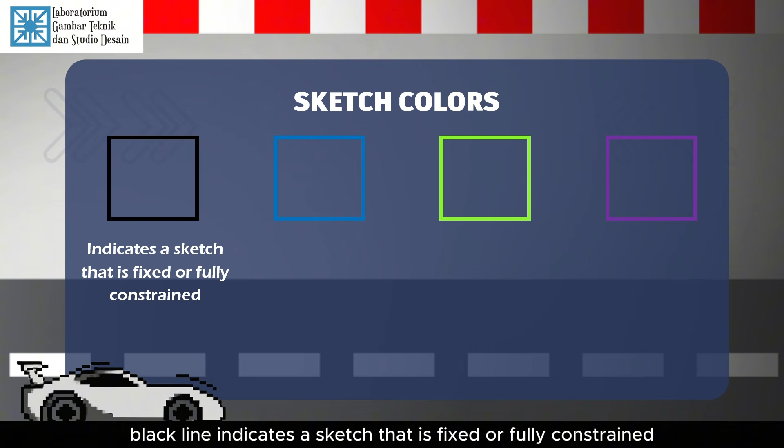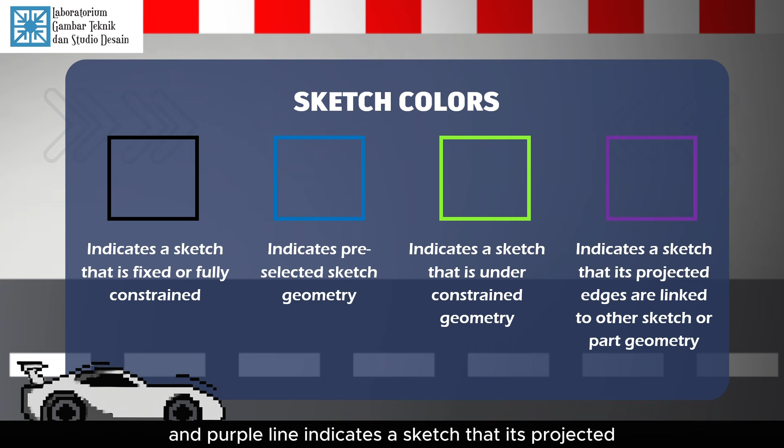In Autodesk Inventor 2026, there are sketch colors. Black line indicates a sketch that is fixed or fully constrained. Blue line indicates pre-selected sketch geometry. Green line indicates a sketch that is under constrained geometry. And purple line indicates a sketch whose projected edges are linked to other sketch or part geometry.

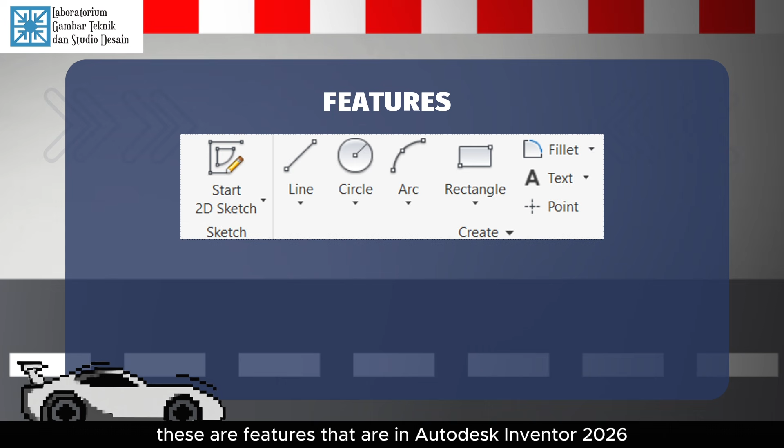These are features that are in Autodesk Inventor 2026. The Sketch panel tab is used to choose a plane for your design, while the Create panel tab is used to make a sketch in a few types of choices.

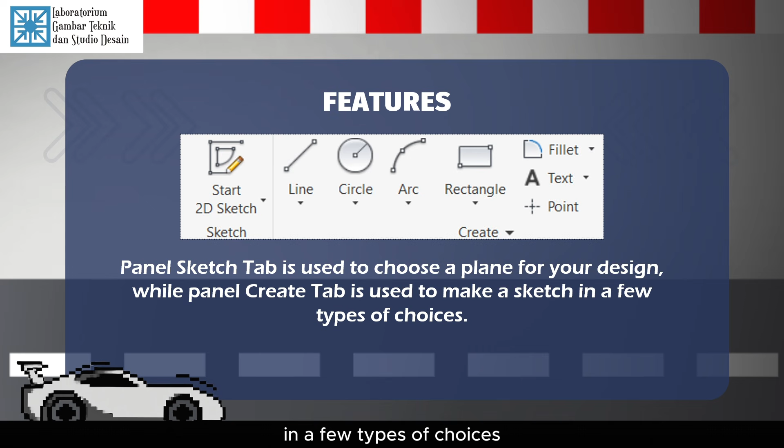Projected geometry is used to make a new sketch using the active geometry. Modify is used as editing tools for our design sketch.

In the sketch creation process, some simple things may become an inconvenience if done manually, such as creating a pattern of a geometry, mirroring a huge part of a sketch, etc.

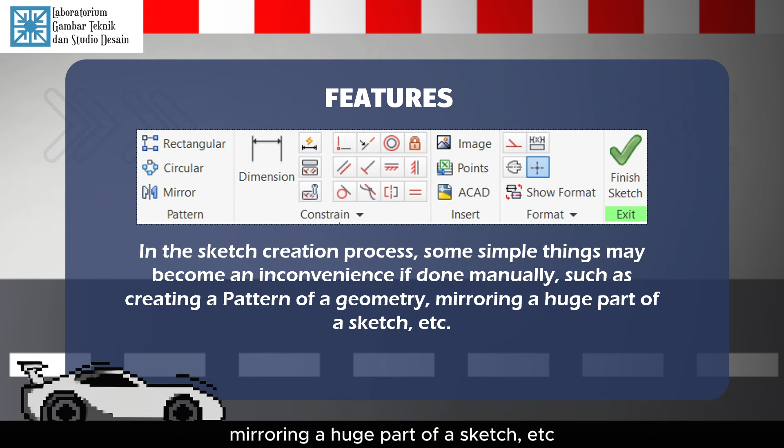Click on New, Expand, en-US, choose Metric, choose Standard mm.ipt, and then click Create. Save part file to labwork folder. Press Ctrl S on your keyboard, rename it to Base, after that click Save. The screen should look like this.

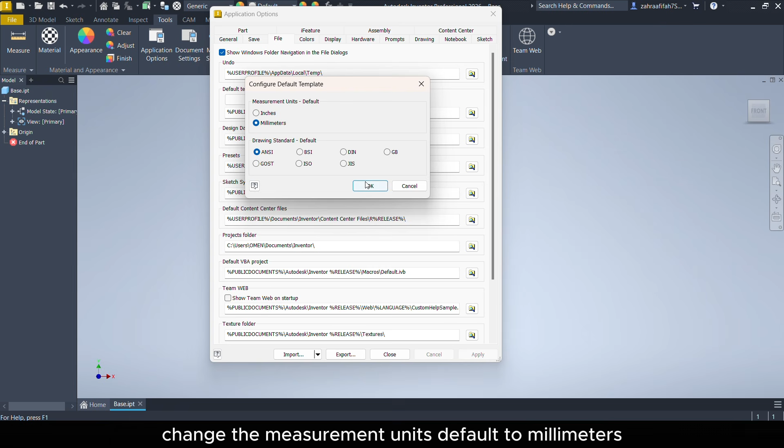Go to Tools tab, choose Application Options, select File, click on Configure Default Template, change the measurement units default to millimeters, click on ANSI, click Override, click Apply, and then Close. The screen should look like this.

Go to Sketch tab, expand Start 2D Sketch, choose Start 2D Sketch, or you can press S, select YZ plane. The result will look like this.

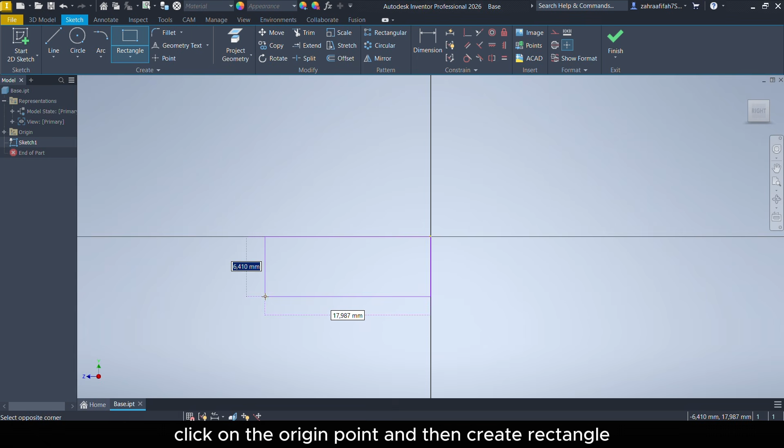Expand Rectangle, choose Rectangle to Point, click on the origin point, and then create rectangle, left click, and right click, after that click OK. Click Dimension, click the vertical line, give dimension 20 mm.

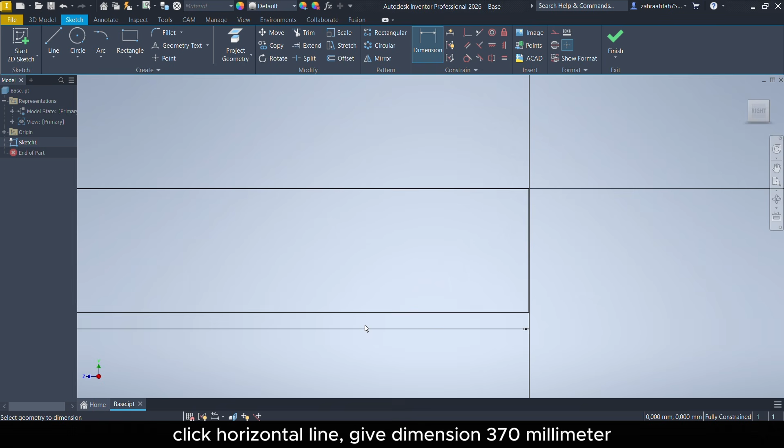After that, click Enter. Click horizontal line, give dimension 370 mm. After that, click Enter. Right-click and click OK.

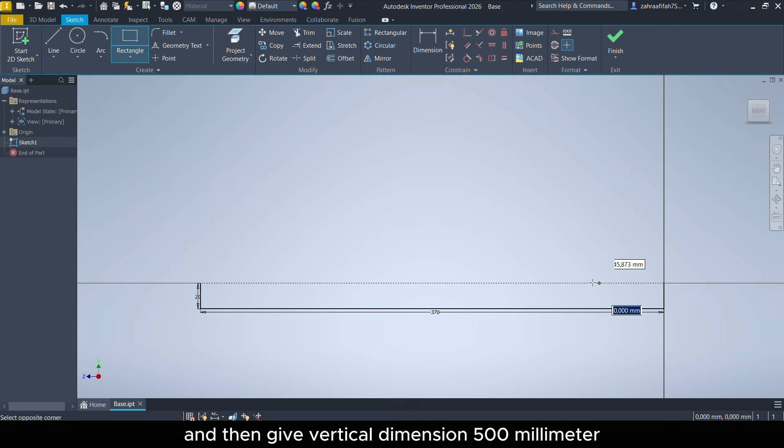Right-click on the upper line, choose Construction, and the result should look like this. Choose Rectangle to Point, click on the origin point, create rectangle, and then give vertical dimension 500 mm, and then

give horizontal dimension 80 mm. Right-click and then click OK. The result should look like this.

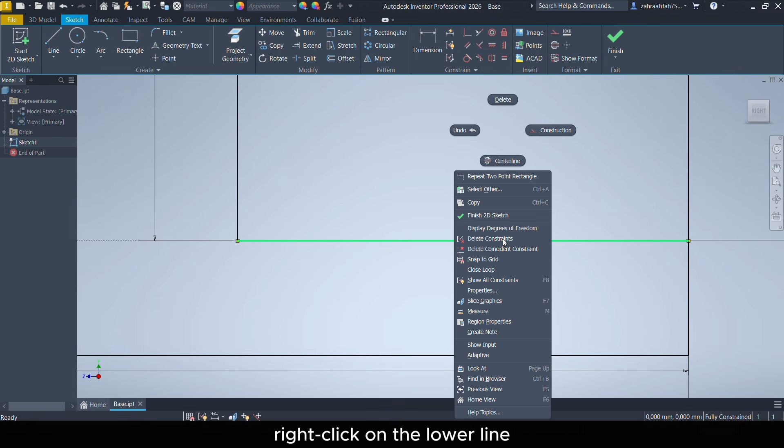Right-click on the lower line, choose Delete. Expand line, choose line, and then click on the point, create line, click on the point, and then left click.

Turn on construction in format, click the point as shown on the illustration, and then drag the line to the left, give dimension 20 mm.

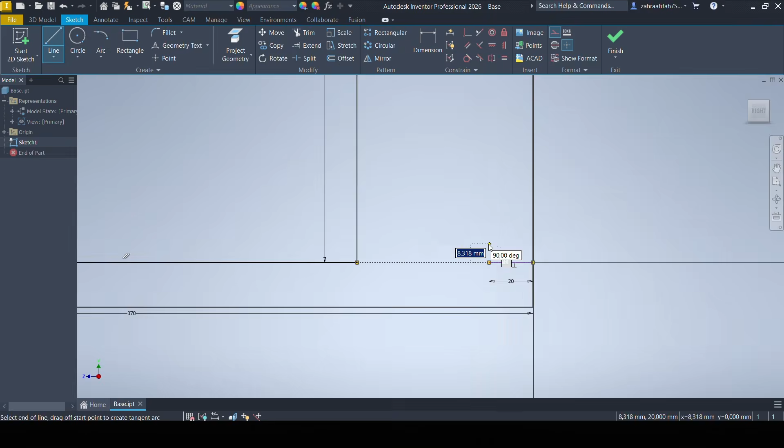Right-click and click OK. Choose Rectangle 2 Point. Don't forget to turn off the construction in format.

Create rectangle from here and then give vertical dimension 480 mm. Tab key, horizontal dimension 40 mm. The result should look like this.

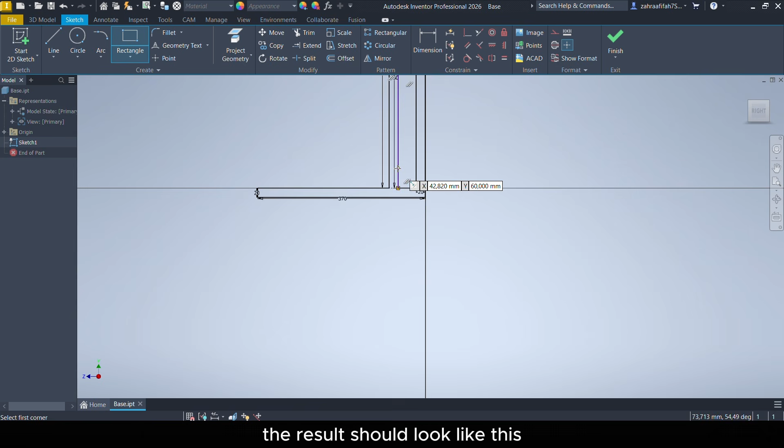Don't forget to right-click and click OK. Go to fillet, choose fillet. Give dimension 10 mm. Click horizontal line and vertical line. After that, right-click and click OK.

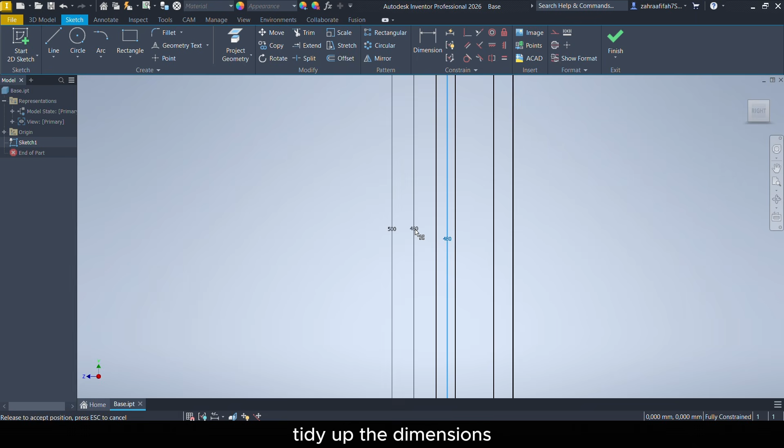Tidy up the dimensions. Click on Finish Sketch to end the sketch. Don't forget to press Ctrl S to save your file.

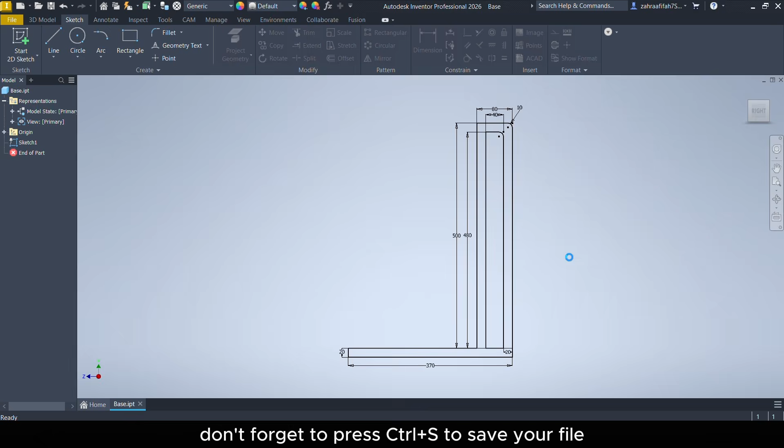Click on File, click on New, choose Standard Millimeter, and then click Create. Save part file to Labwork folder. Ctrl S and then rename it to Support Bar, and then click Save. The screen should look like this.

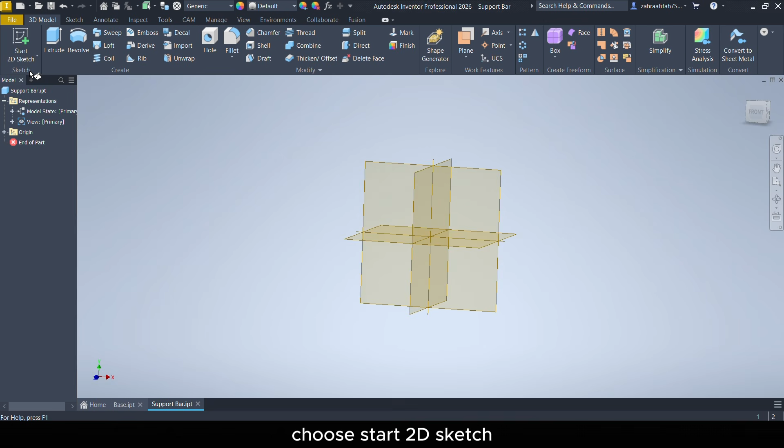Go to Sketch tab, expand Start 2D Sketch, choose Start 2D Sketch, and then select XZ Plane. Click on the left arrow to change the view position. The result should look like this.

Go to Line, choose Line, create line, and then drag the line to the right, give dimension 50 mm. Click Enter.

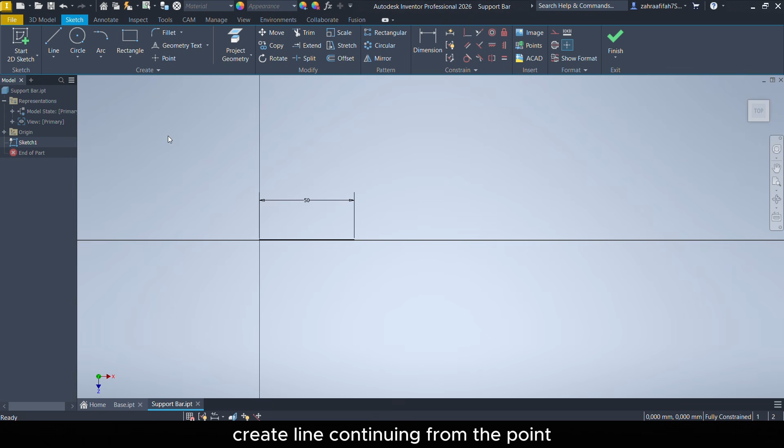Create line continuing from the point. Create line and give dimension 10 mm, 35 mm, 20 mm. After that, click Enter.

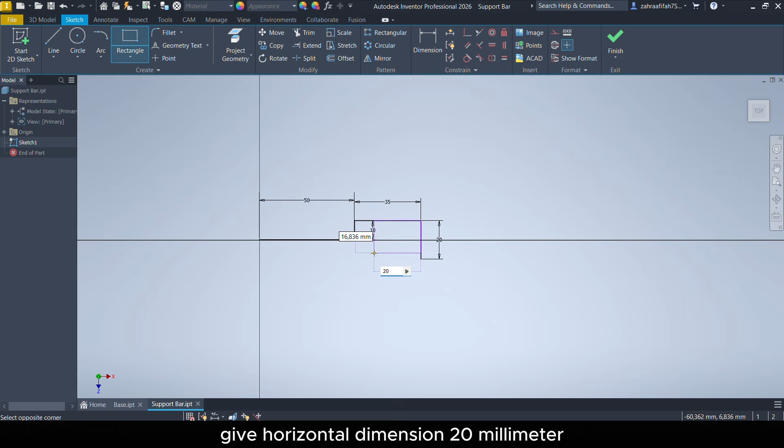Choose Rectangle 2 Point, create rectangle. Give horizontal dimension 20 mm. Click Tab key. Give vertical dimension 12 mm. Click Enter key. Turn on construction in format.

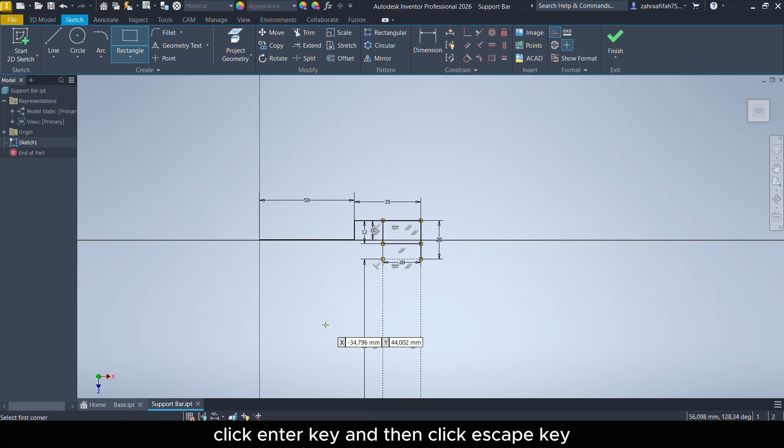Create rectangle from here. Give horizontal dimension 20 mm. Click Tab key. Give vertical dimension 90 mm. Click Enter key and then click Escape key. The result should look like this.

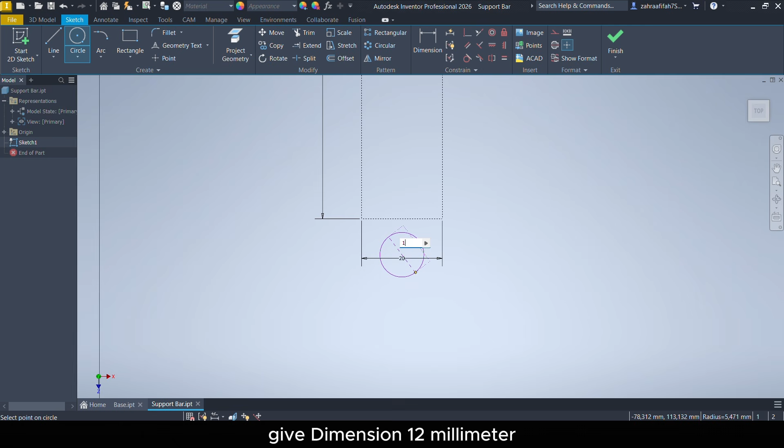Turn off construction in format. Expand circle, choose Circle Center Point. Create circle under the rectangle. Give dimension 12 mm. Click Enter key. Click Escape key.

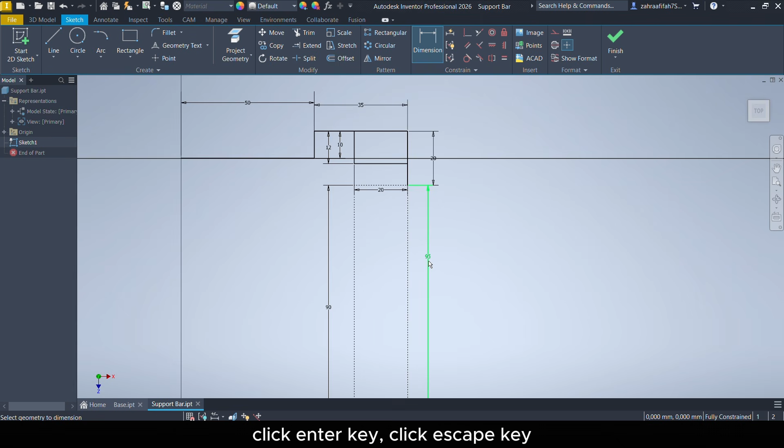Choose vertical constraint. Click the center point of the circle and then click on the center point on the bottom line of the rectangle. Click dimension. Click on the circle. Click on the upper line of the rectangle. Left click and then give dimension 95 mm. Click Enter key, click Escape key. The result should look like this.

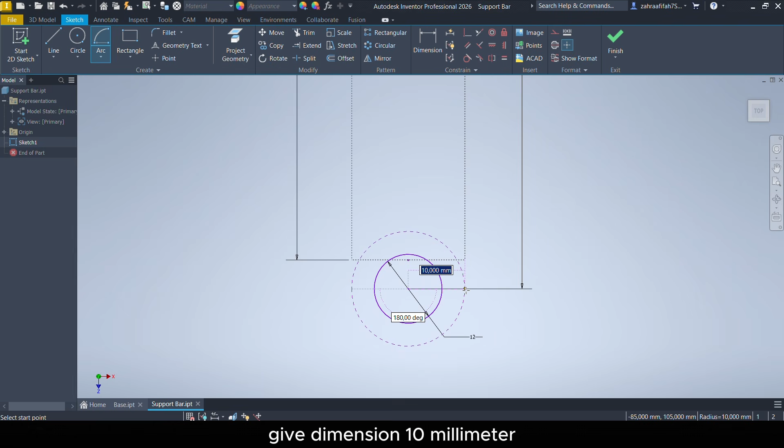Tidy up the dimensions. Expand arc. Choose arc center point. Click on the point, drag the line to the right, give dimension 10 mm, drag the arc to the bottom, give degree 180 degrees, click Enter key and then click Escape key. The result should look like this.

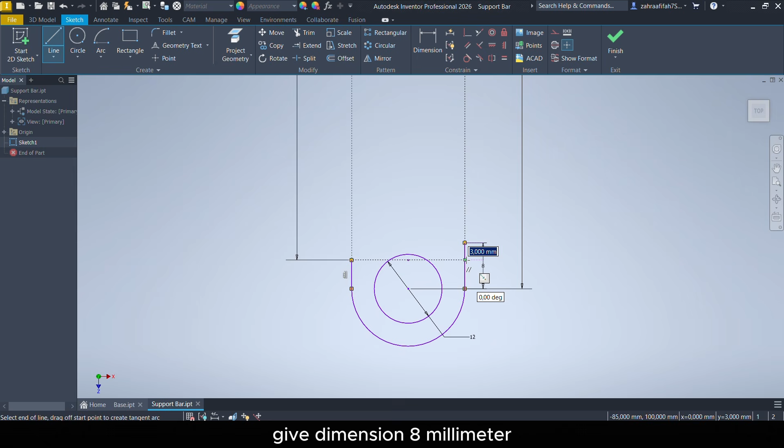Choose line, create line, drag the line to the point on top, create line, drag the line up, give dimension 8 mm. Click Enter key. The result should look like this.

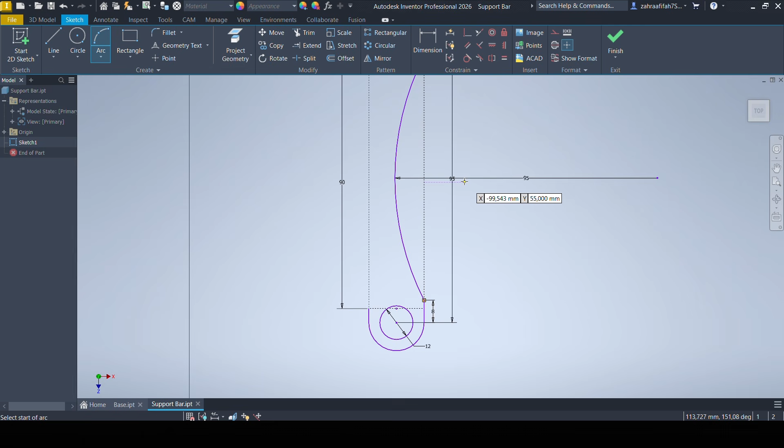Expand arc, choose arc 3 point, drag the line to the point as shown in the illustration, drag the arc to the left as shown in the illustration, give dimension 95 mm. Click Enter. Do the same for the other one. When the arc goes to the left, give dimension 85 mm.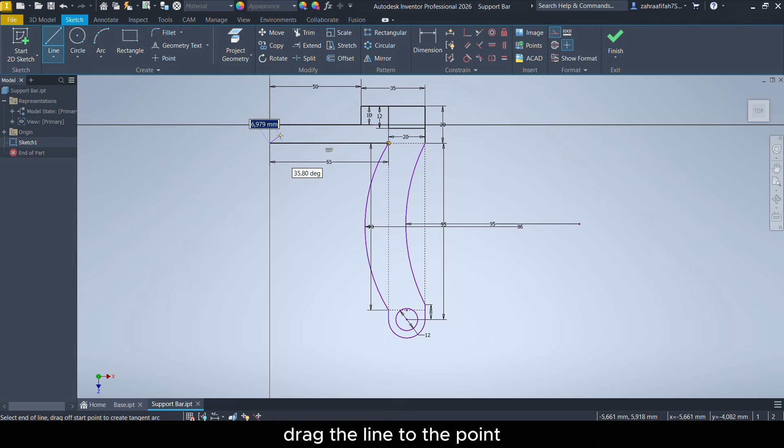Click Enter. Choose line, drag the line to the point, give dimension 65 mm, and then turn on the construction in format. Drag the line to the point, make sure dimension is 10 mm, left click and then Escape key.

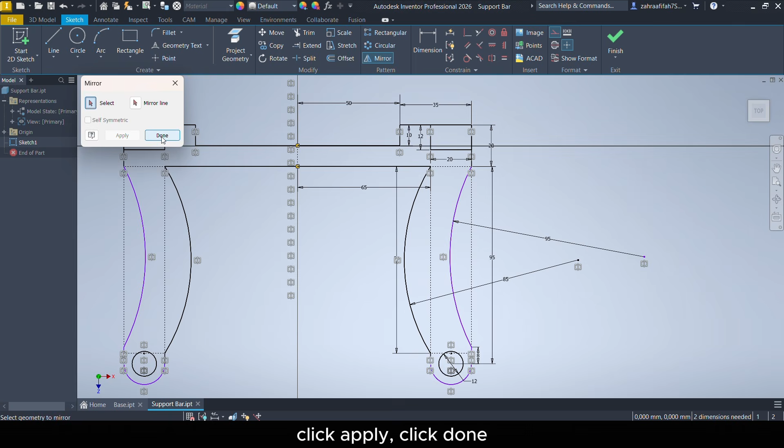Choose mirror in pattern, click select, hold left mouse button to block the whole drawing, click mirror line, click on the line as shown in the illustration, click Apply, click Done. The result should look like this. Click on Finish Sketch to end the sketch. Don't forget to save your file.

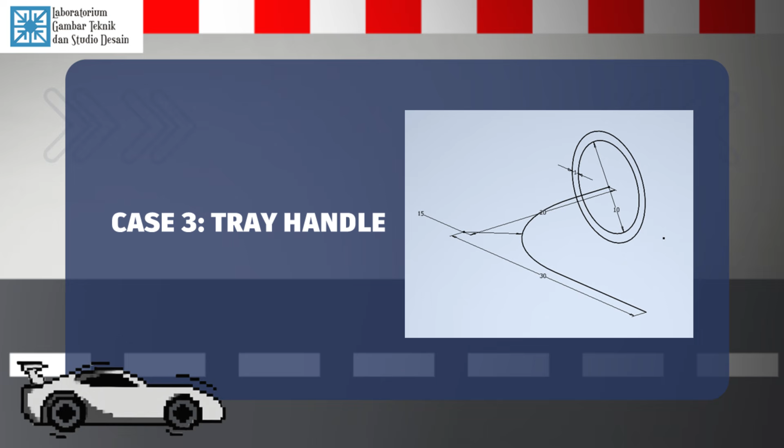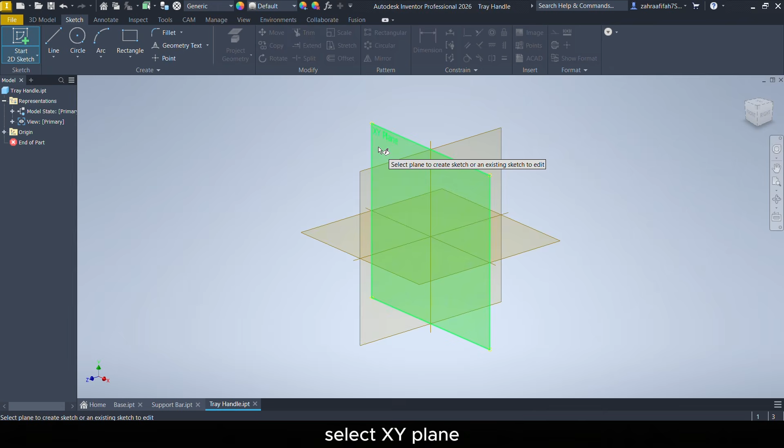Click on File, click on New, choose Standard Millimeter, click Create. Save part file to LabWork folder. Ctrl S, rename it to Tray Handle, and then click Save. Go to Sketch tab, expand Start 2D Sketch, choose Start 2D Sketch. Select XY plane, and the screen will look like this.

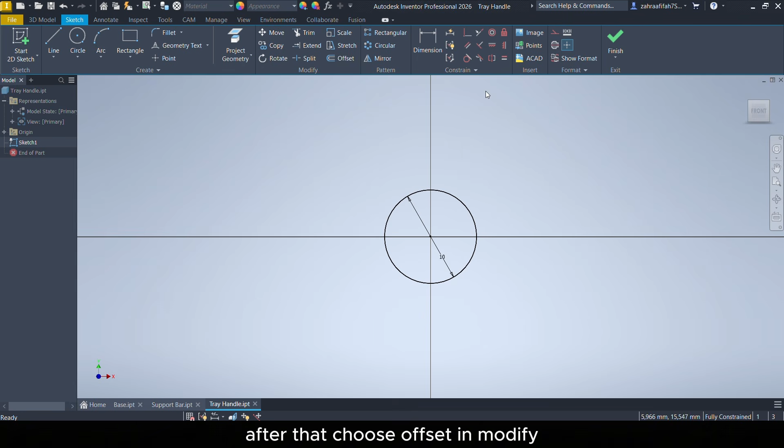Go to Circle, expand the circle, choose Circle Center Point. Click on the origin, create circle, give dimension 10 mm, click Enter. After that, choose Offset in Modify. Click on the circle, create an offset, drag the offset outside, give dimension 1 mm, click Enter, and then click Escape. The result should look like this.

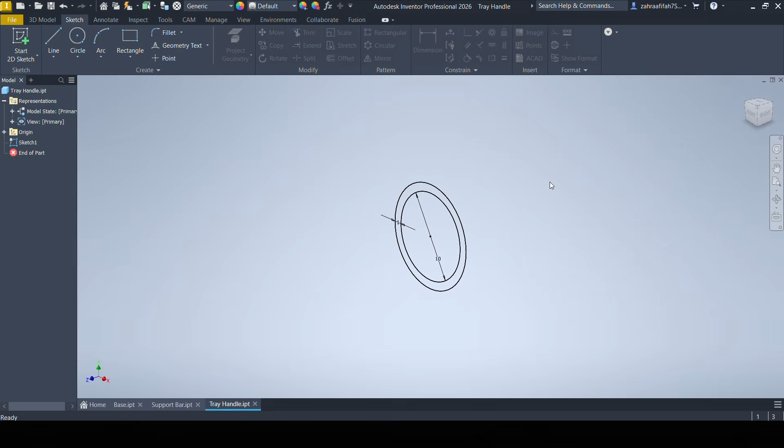Click on Finish Sketch, and then go to 3D Model tab, choose Start 2D Sketch, choose XZ Plane, click on the left arrow to change the view position. The result should look like this.

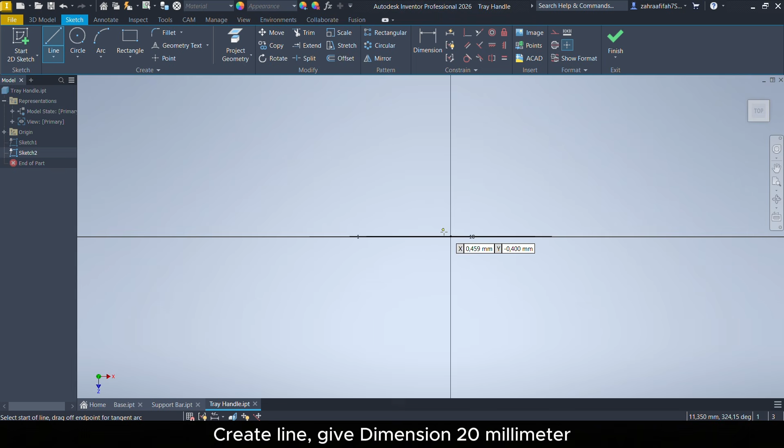After that, expand the line, choose Line, create line, give dimension 20 mm, click Enter key. After that, create line to the right, give dimension 30 mm, click Enter key, and then click Escape key. The result should look like this.

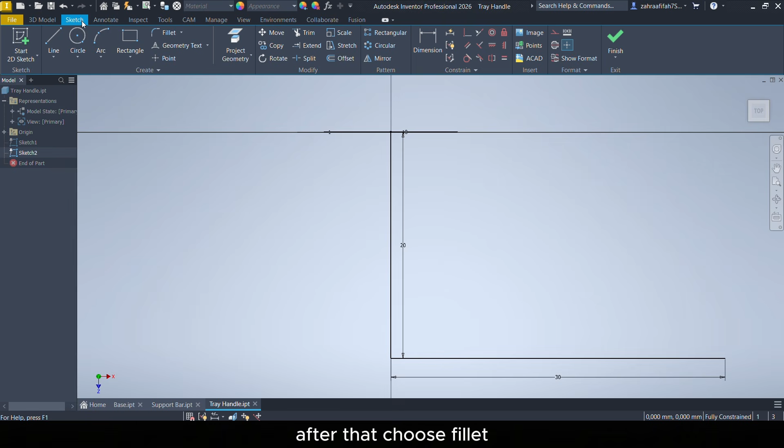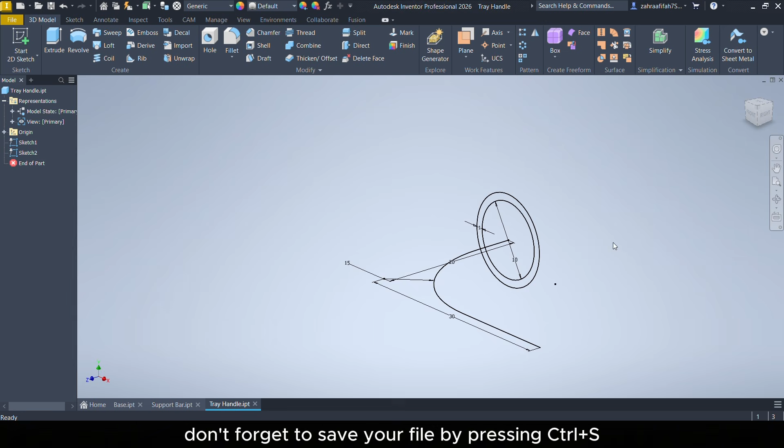After that, choose Fillet, give dimension 15 mm, click Vertical line, click Horizontal line. After that, right-click and then click OK. Click on Finish Sketch to end the sketch. Don't forget to save your file by pressing Ctrl S.

Click on File, click on New, choose Standard Millimeter, and then click Create. Save part file to LabWork folder. Rename it to Feet Rubber, and then click Save. Go to Sketch tab, expand Start 2D Sketch, choose Start 2D Sketch, and then select the YZ plane, and the screen will look like this.

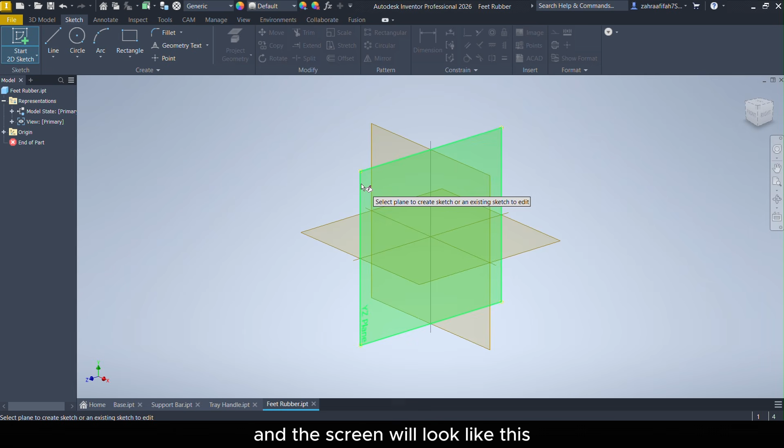Expand rectangle, choose rectangle 2 point, create rectangle, pull the cursor to the top right, give vertical dimension 10 mm, give horizontal dimension 20 mm.

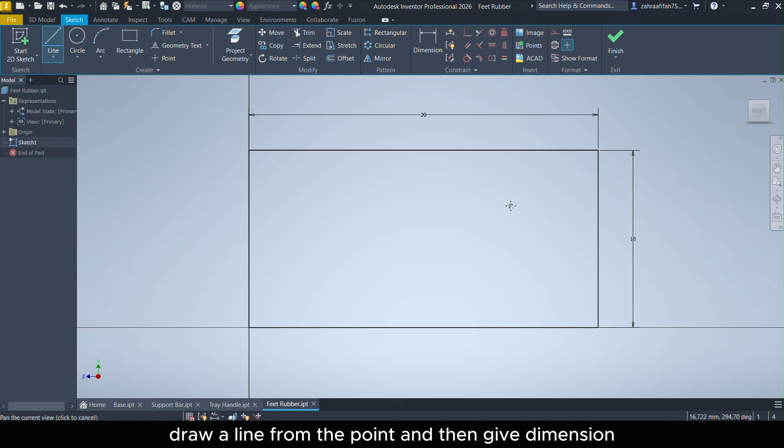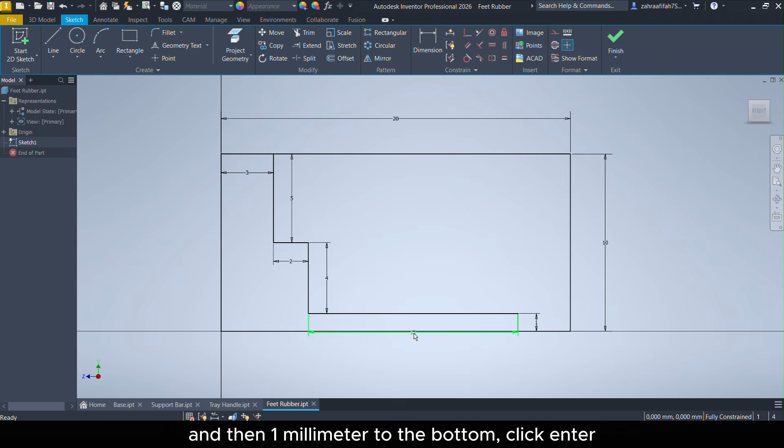And then choose line, create line from the point, and then give dimension 3 mm to the right, 5 mm to the bottom, 2 mm to the right, 4 mm to the bottom, 12 mm to the right, and then 1 mm to the bottom. Click Enter. Click on Finish Sketch to end the sketch. And the result should look like this. Press Ctrl S on your keyboard to save your lab work.

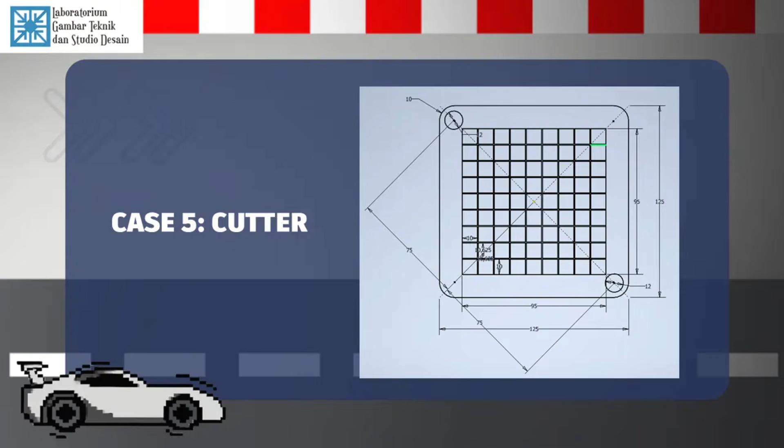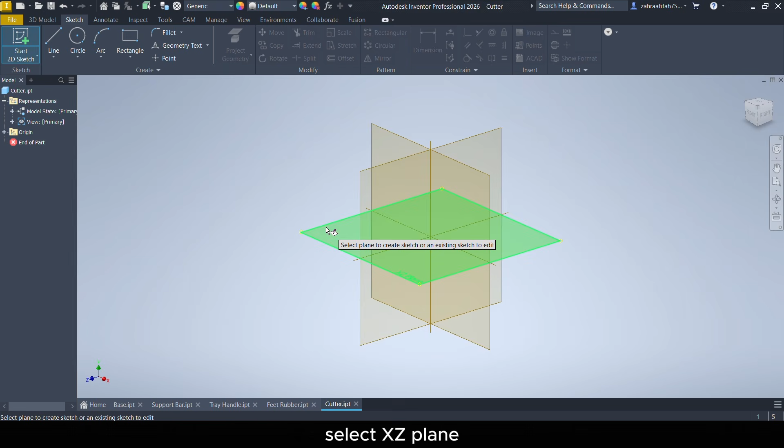Click on File, click on New, choose Standard Millimeter, click Create. Save the part file by pressing Ctrl S and then rename it to Cutter, and then save. Go to Sketch tab, expand Start 2D Sketch, choose Start 2D Sketch, select XZ Plane, click on the left arrow to change the view position.

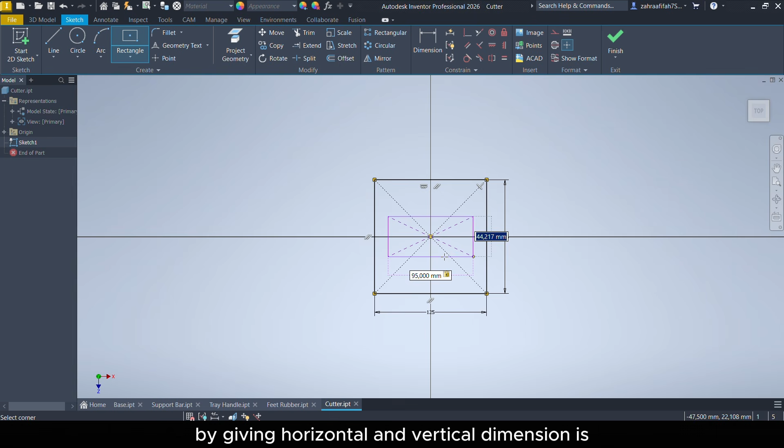Expand rectangle, choose rectangle 2 point center, create rectangle, give horizontal dimension 125 mm, and the vertical dimension is 125 mm. Create another rectangle by giving horizontal and vertical dimension of 95 mm. Expand rectangle, choose rectangle 2 point, create rectangle, give horizontal and vertical dimension of 10 mm, and then click Enter.

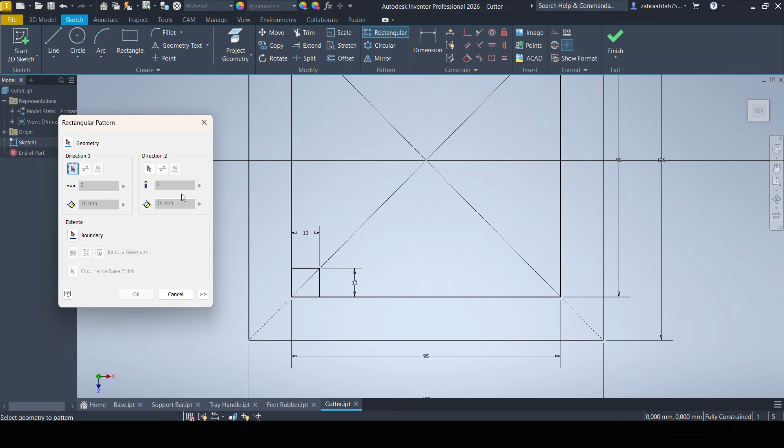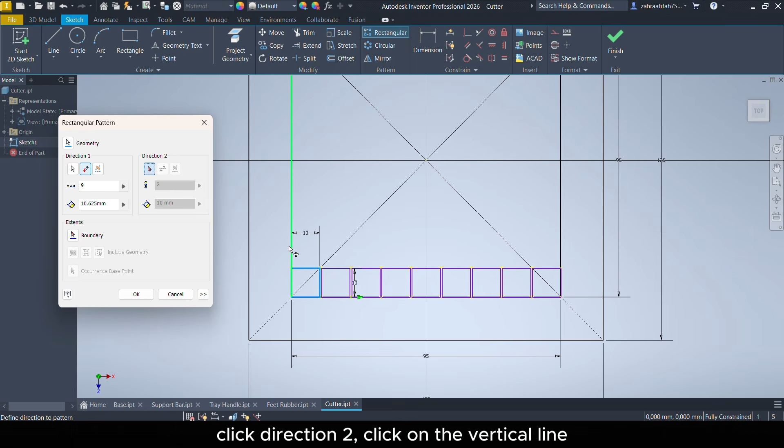Choose rectangular pattern, click on geometry, select the rectangle, click direction 1, click on the horizontal line, click flip, give count 9, and then give spacing 10.625 mm. Click direction 2, click on the vertical line, give count 9, and give spacing 10.625 mm.

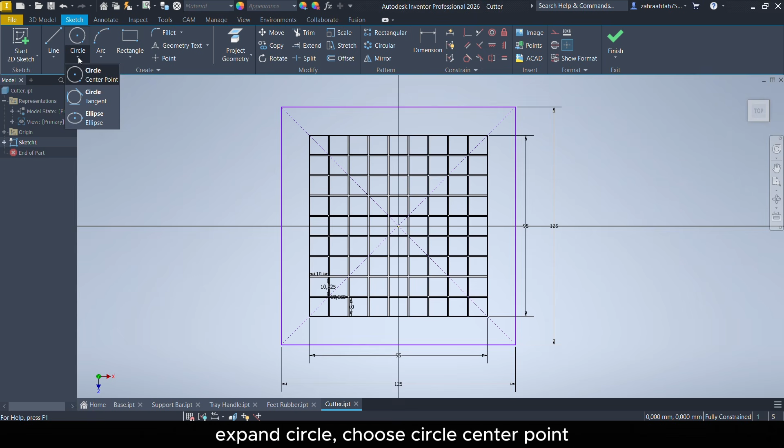Turn on flip if the pattern direction goes down. If the pattern direction is already going up, then turn off flip. Click OK. The pattern should look like this. Expand circle, choose circle center point, create circle on top left, give dimension 12 mm, and then create circle on bottom right. Give dimension 12 mm. Click enter and then click escape.

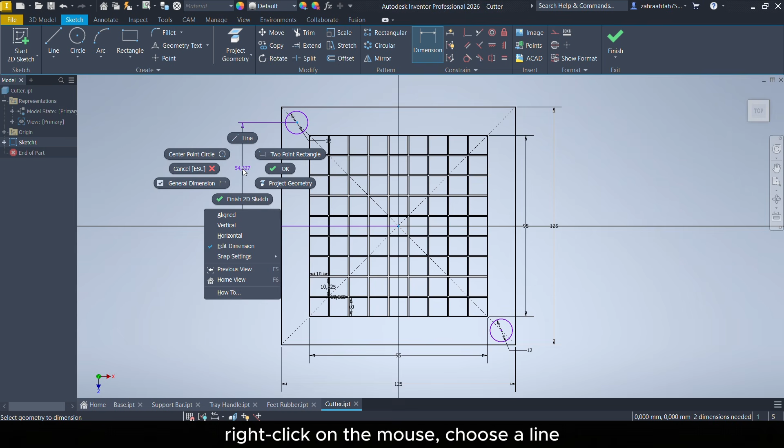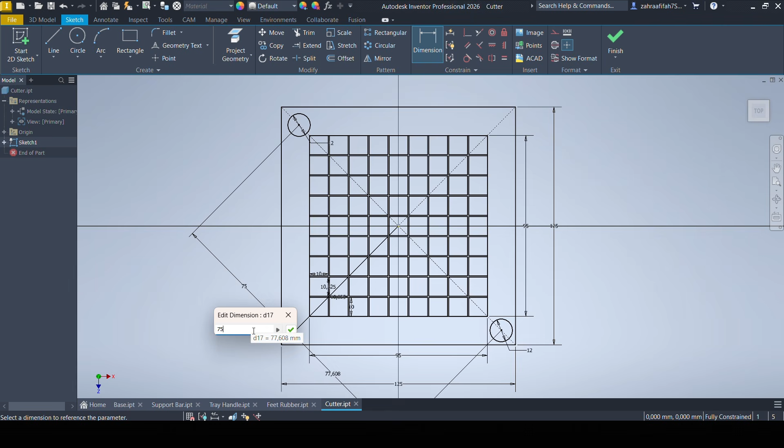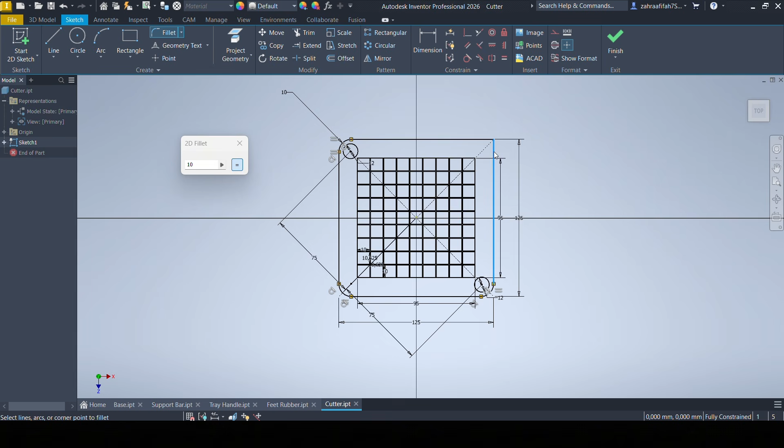Choose dimension, click the center point of the circle, and then click the origin point. Right-click on the mouse, choose aligned, and then give dimension 75 mm, and then click enter. Do the same for the other one. Go to fillet, choose fillet and then give dimension 10 mm. After that, apply it on all of the corners, like this. The result should look like this. Click Finish Sketch. After that, press Ctrl S to save your lab work.

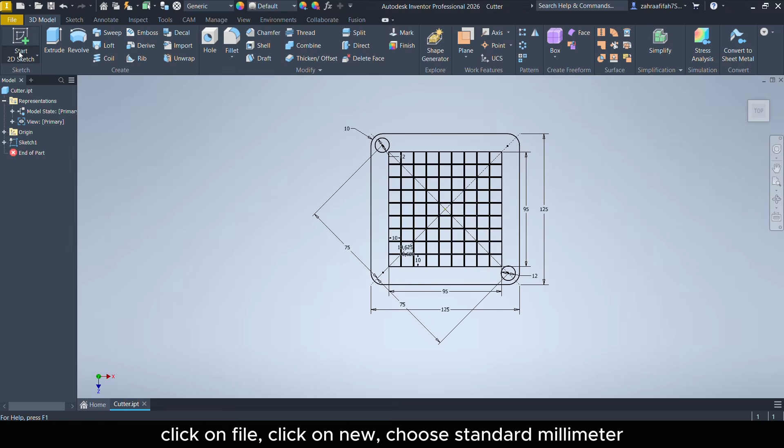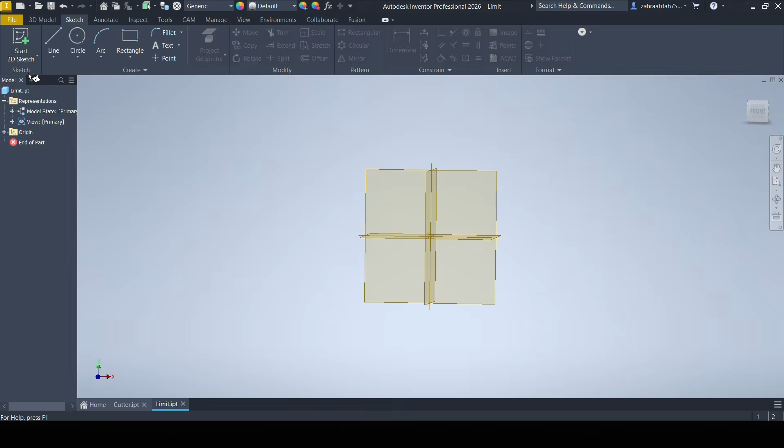Click on File, click on New, choose Standard Millimeter, and then click Create. Save the part file by pressing Ctrl S and then rename it to Limit. After that, click Save. Go to Sketch tab, expand Start 2D Sketch, choose Start 2D Sketch, select XZ Plane, and the screen will look like this. Click on the left arrow to change the view position.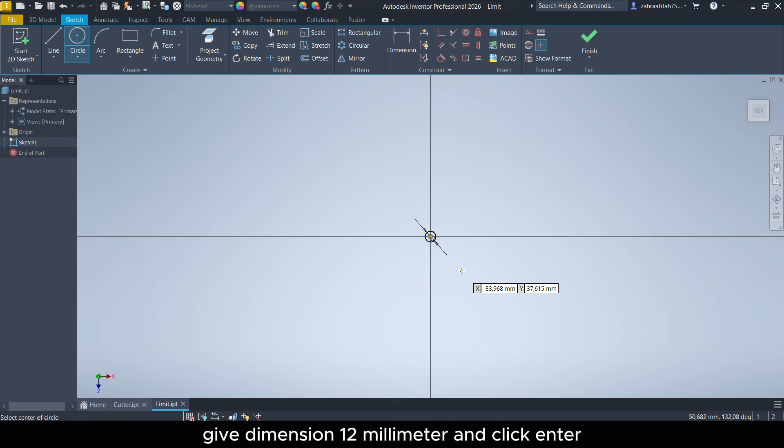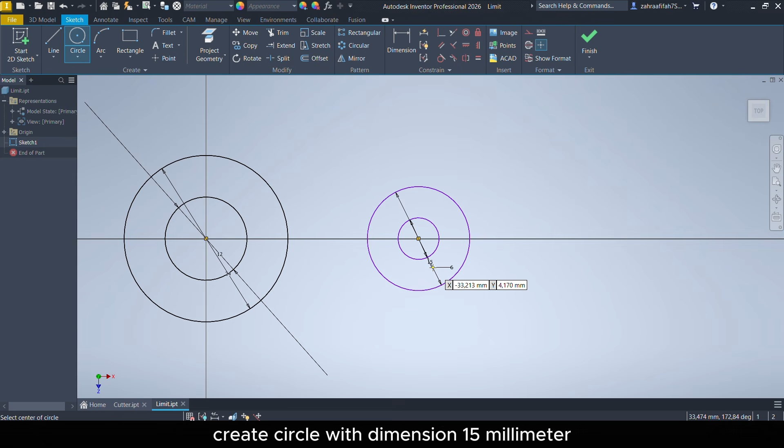Expand circle, choose circle center point, create circle from the origin, give dimension 12 mm, and click enter. Make another circle with dimension 24 mm. Create circle with dimension 6 mm. And from the same center point, create circle with dimension 15 mm. Choose concentric constraint, click on inner circle and click on outer circle. If the create constraint notification appears, click cancel.

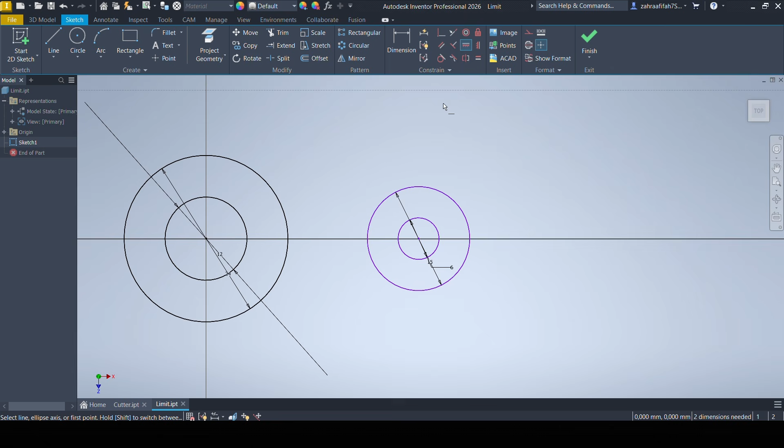Go to constraint in Sketch tab, choose horizontal constraint, and click on right circle center point. Click on left circle center point, click dimension, click on left outer circle, and click on right outer circle. Give dimension 27.5 mm. Choose line, click on the point, create line, click on the point as shown in the

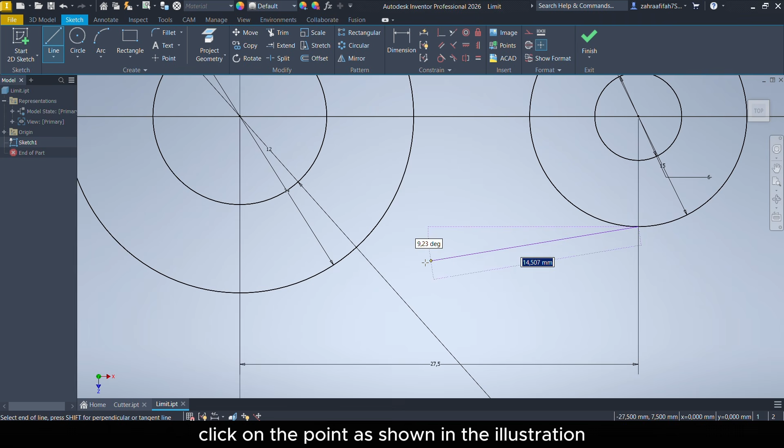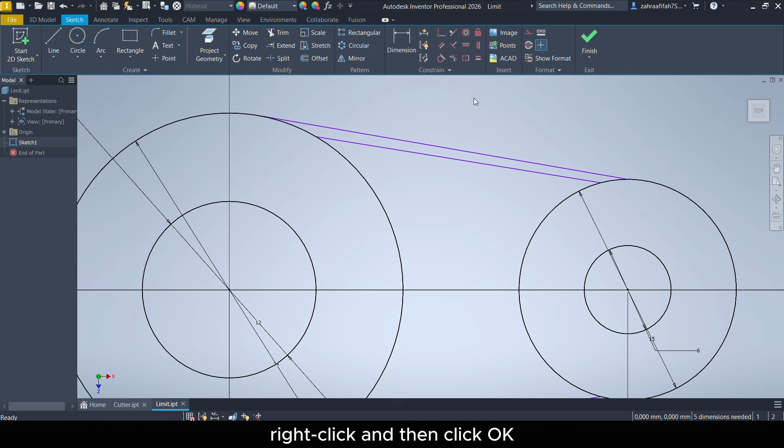illustration until the tangent symbol appears. The result should have a tangent constraint, and click on the point until the dashed line appears. And make it for the other one. Right click and then click OK. Choose parallel constraint, click on upper line and lower line. If the create constraint notification appears, click cancel. Click dimension, click on upper line and lower line. Give dimension 1 mm. Same for the other one.

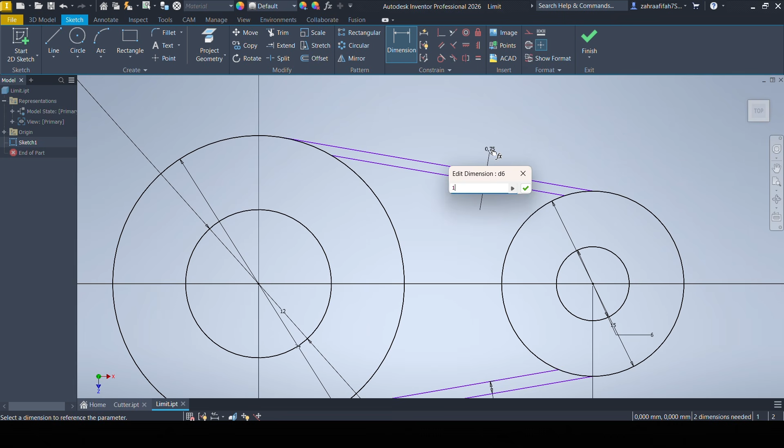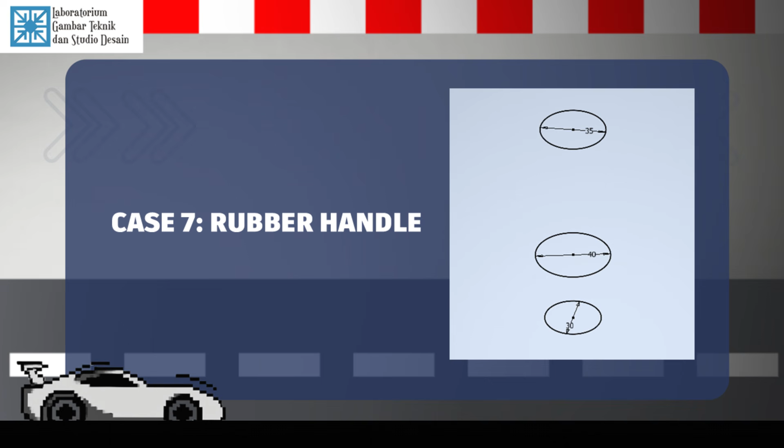Click on Finish Sketch to end the sketch. Press Ctrl S on your keyboard to save your lab work. And this is the result. Click on File, click on New, choose Standard Millimeter, and then click Create. Save the part file by pressing Ctrl S and then rename it to Rubber Handle, and then click Save. The screen should look like

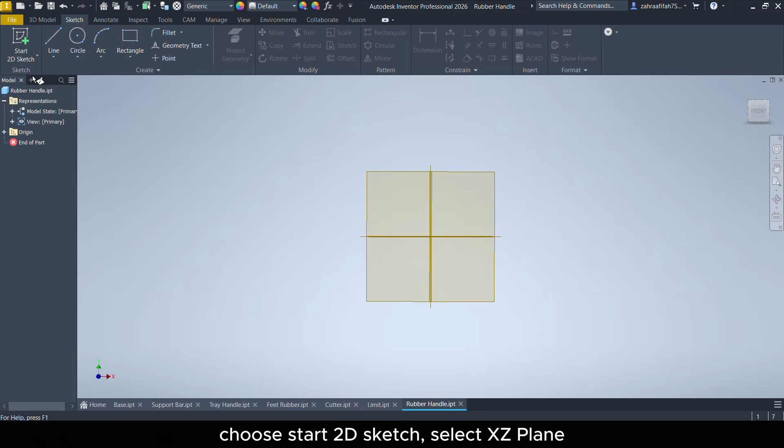this. Go to Sketch tab, expand Start 2D Sketch, choose Start 2D Sketch, select XZ plane, click on the right arrow to change the view position. Expand circle, choose circle center point, create circle, give dimension 30 mm, click enter and click escape. After that, click on finish sketch to end the sketch.

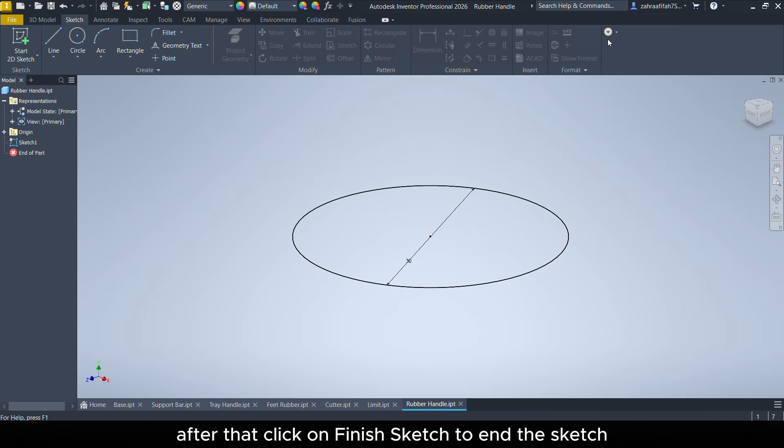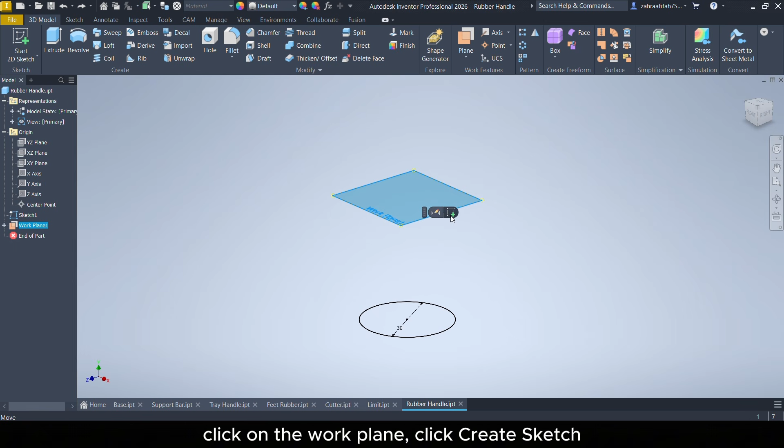Go to 3D model tab, expand plane, choose offset from plane, go to model, expand origin, choose XZ plane and give dimension 40 mm, click enter. The result should look like this. Click on the work plane, click create sketch, and go to sketch tab, expand circle, choose circle center point, create circle from the origin point, give dimension 40 mm, click enter, and then click finish sketch to end the sketch.

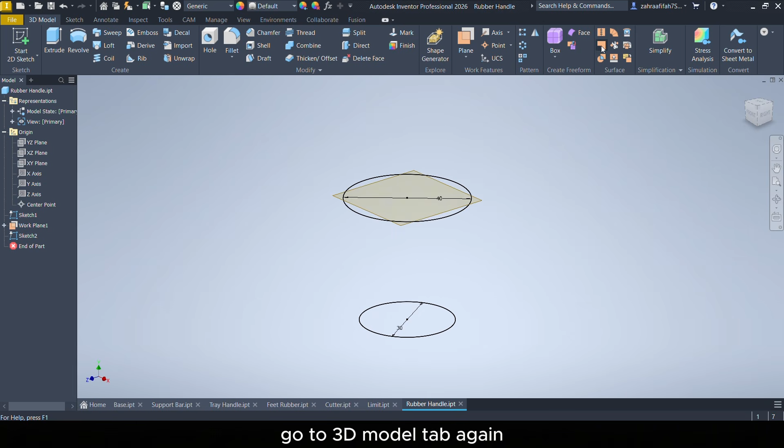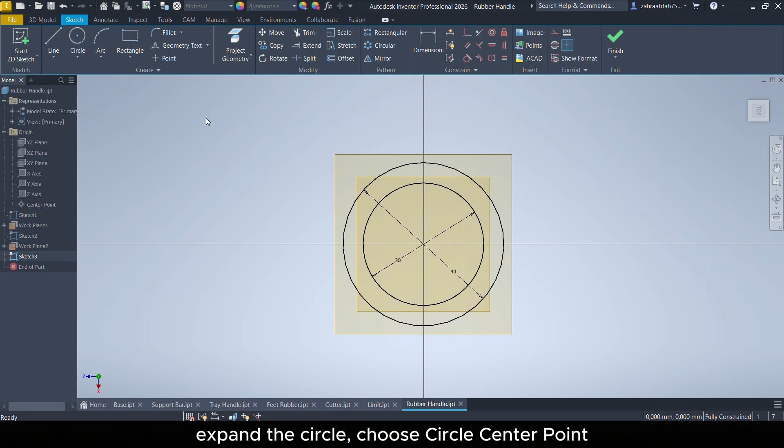Go to 3D model tab again, expand plane, choose offset from plane, go to model, expand origin, choose XZ plane, give dimension 120 mm, click enter. Click on the second work plane, click create sketch, and then go to sketch tab, expand the circle, choose circle center point, create circle, give dimension 35 mm, click enter and then click escape. Click on finish sketch to end the sketch.